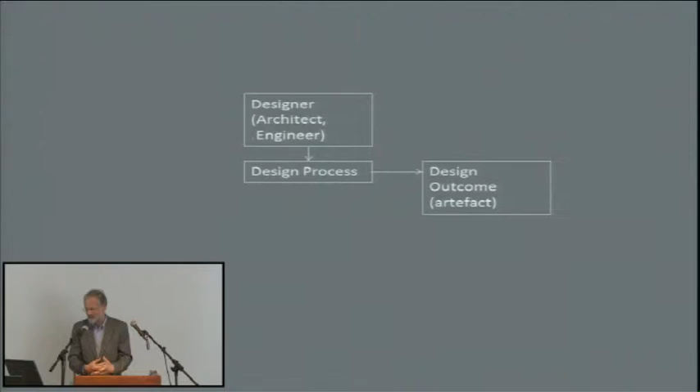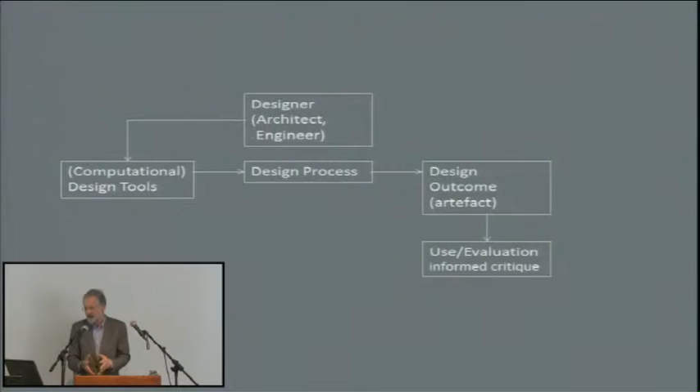Anyway, I want to declare my interest. I'm not an architect, but I'm very interested in architecture and the design process, and in particular how we evaluate and develop an informed criticism of architecture. I'm also interested in computational design tools, so my role is the developer of the design tool. But my interest, or the interest of a software developer, should extend beyond just the specific tools being developed.

We should consider the whole process. In particular, the architect or engineer using the design tool has some influence on it, but the tool also has an influence on the user. What is that influence, and what is the overall effect? We create a design tool, give it to architects and engineers to use, but we're interested in what actually happened at the end of that process. Did we make better buildings? Were people more comfortable, and was their well-being improved?

So, to go back to the title of the article in AD, T obviously means at some moment in time, and T plus N means some time later. I'm taking a little risk here, as always, because I'm going to set T to be the year 1967, which is quite some time ago.

I was a student at the Royal College of Art, and Bruce Archer, who was the professor of design methods and research, was my supervisor. I went to him and said, can you suggest something interesting to do as a final year dissertation? He said, well, there's this new area of computer-aided design coming along, maybe you should have a look at that. The Royal College of Art is next to Imperial College, so I walked across the road, and there was the first PDP-7, which I used in 1967.

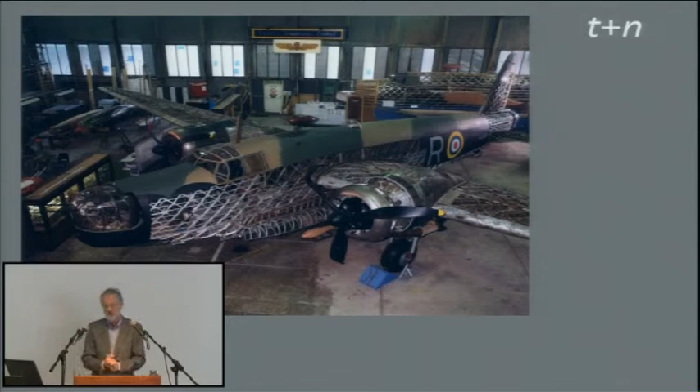Take another example, a diagrid. I'm quite sure this is not the first use of a diagrid. This is Barnes-Wallis's Wellington bomber, 1936. It looks quite nice—I just took this image and turned it around. It really makes a good building, stand it up on end, put a different background behind it. So there we are, 1936 as T, and I pulled this out of the internet: Ornamelt, a diagrid decoration facade from the Greg Lynn studio at the University of Applied Arts in Vienna.

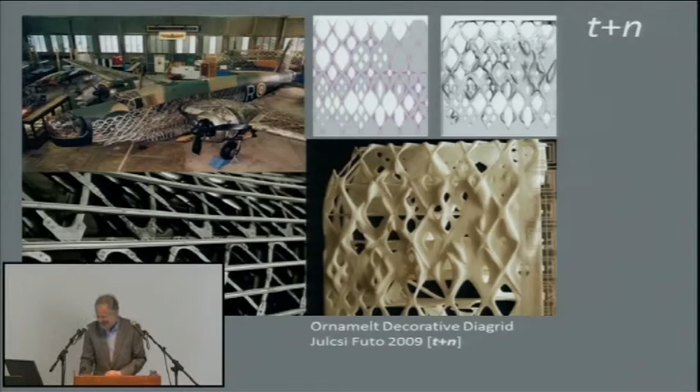Effective use of a shading device—I think we could all understand that. So looking around, I find this image, which is a shading device popped on the north face of a building in the Northern Hemisphere.

When I got hold of this image, I rang up the people who make this and said, could we use the image in AD? I had this really fascinating conversation. They said: we get a lot of architects coming in, they want to modernize their buildings, they just want—we have this program that tells them how much shading the device will affect a window, but we give the program away and they don't use it. They just put it on the facade of the building to make the building look contemporary.

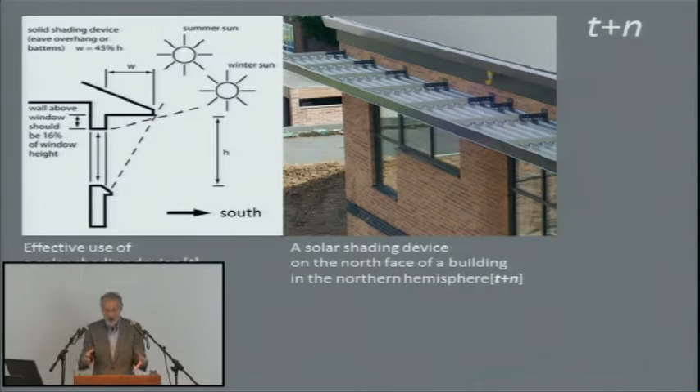So what does this tell us about an architect's understanding of the natural world? And what does that building tell the lay public about an architect's understanding? It raises an interesting question about style and decoration. Style and decoration can accentuate something, but if it does something really wrong, isn't that kind of problematic?

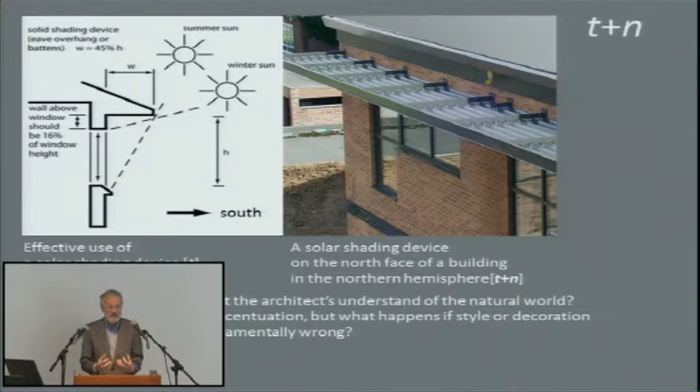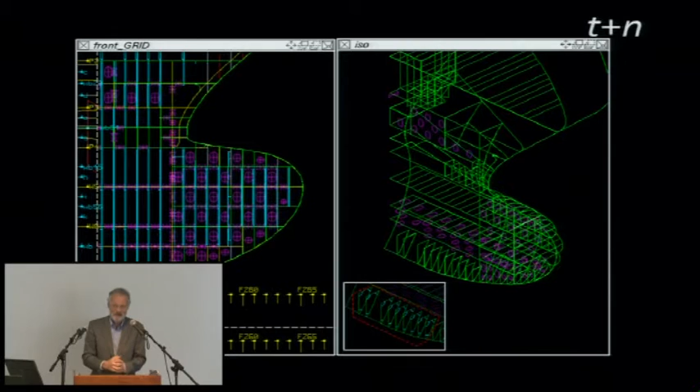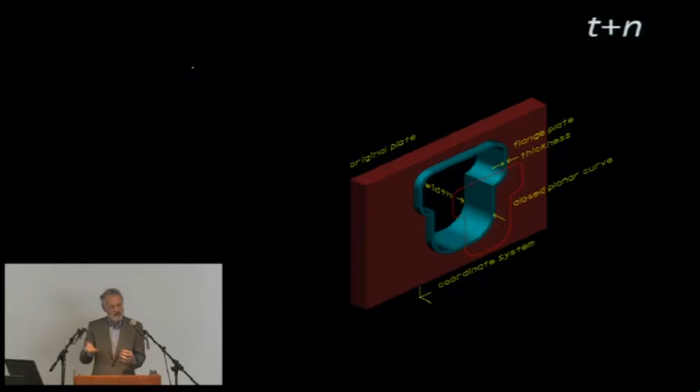So, another theme: parametric design. I was doing parametric design in about 1989 in the naval architecture experience with Intergraph that Terry mentioned—even drawing little diagrams to show the relationship between all the different components. Something very humble: cutting a hole in a steel plate and lining it with a flange.

Parametricism—a methodologically justified style, according to world architecture. If Bruce Archer had lived to see that statement, he would be amazed, because no amount of methodology can justify a style. A style has to exist in its cultural justification.

So another transformation—I try and teach this. We take a square, we scale it, we rotate it, we translate it, and we shear it.

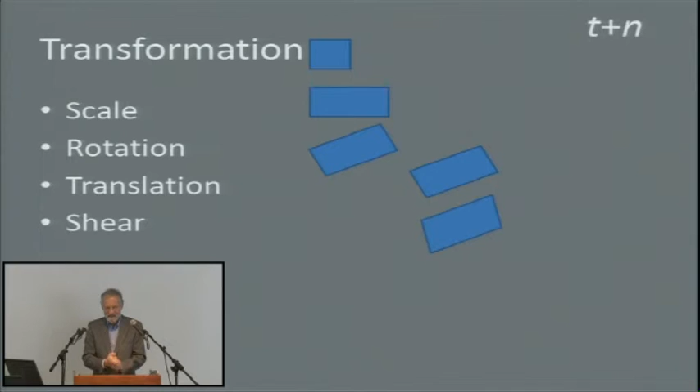I was once giving a workshop on generative components to a group of mid-career architects, and this lady architect at the back said, every time you introduce a new concept, you lose half the audience. I'm not quite sure what happens, because this lady must have gone to a reasonable architectural school where all the ideas are flowing around—it's a really interesting place. What happens after 15 years in architectural practice that you can't assimilate some new concepts?

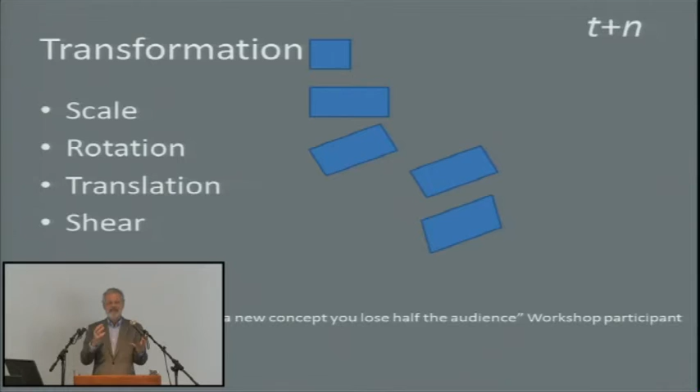So let's take a different tack here—let's go for an analog design system. We have the flow rate as the scale: you make your profile, your cross-section of your building. Flow rate is the scale.

The height is the vertical translation, the rotation, twist, gives you the rotation, and a little bit of lateral shift gives you a nice bit of shear. And if you're really good at this, you just throw in a little coordinated wobble and you get that nice inflection in the design. So you don't need to know about translation, rotation, scale and shear—you just do it and see the result.

Enjoyable. But my question is: what concepts do we have to give people, and how do we have to present them, so that they are properly assimilated? I think that ecological design and the whole of this issue is, if you like, a way of countering this drift from function at time T to decoration at time T plus n—or not decoration, but superficiality.

I think it says architecture has to be sensible. It can be lots of other things as well—it can be entertaining—but it has to have this relationship with sense. So the issue I confront is: how do we build tools that are, on the one hand, immediately usable and very intuitive, but also sufficiently abstract that they've got depth, so people can do things with them.

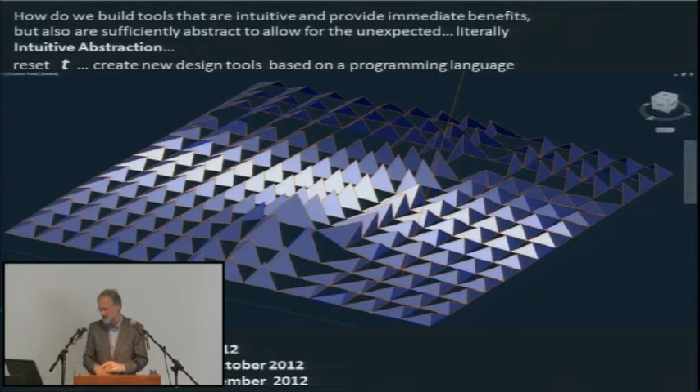But I want to finish on a more philosophical note. I bumped into three different quotations which I find quite interesting. I was talking to a person who just graduated from MIT, who worked with me on generative components, and his comment was that he thought technology should be invisible.

The implication there is that yes, you can make technology invisible if your strategy is to retrofit it to some existing workflow and not require the user to change his workflow or conceptualization. So that's the kind of iPhone app that's totally intuitive—I'm sketching as I would have sketched before, but now it's an electronic pencil.

Okay, so these tools give these possibilities. They give some advantage, and advantage can become a convenience, and to a certain extent these technologies trap you in doing what you did before, only making it more convenient. So it becomes a convention. So it raises the question: should design tools make designing easier? And how could you disagree with that, except for the fact that it traps you inside these conventions?

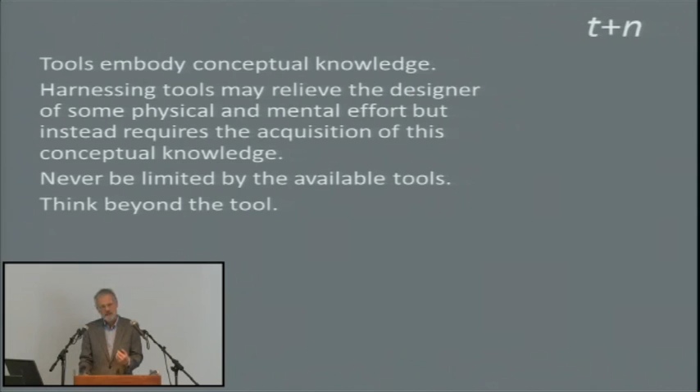So one should never be limited by the tool. You must think beyond the tool. The tool should challenge the designer, the designer should challenge the tool. Become your own tool builder and challenge yourself.